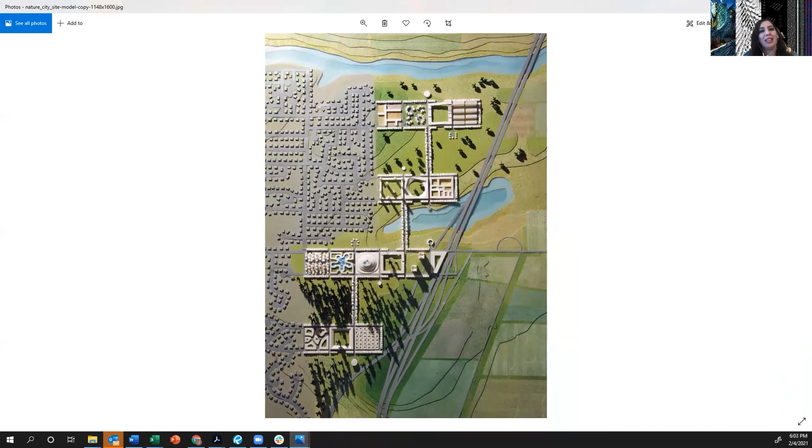Yes, thank you, Professor Huber. I would actually be more than happy and honored to introduce our guest speaker, Dr. Christoph Reinhart, for today. And I will tell you a little bit of background, why I came to know Dr. Reinhart, but I will start with the formal introduction. For all of you, Dr. Christoph Reinhart is a building scientist and architectural educator working in the field of sustainable building design and environmental modeling.

At MIT, he is the director of the Building Technology Program and the head of the Sustainable Design Lab, an interdisciplinary group with grounding in architecture that develops design workflows, planning tools, and metrics to evaluate the environmental performance of buildings and neighborhoods. He's also a managing member at Solemma, a technology company and Harvard University spinoff, as well as strategic development advisor for Mapdwell, a solar mapping company and MIT spinoff.

Products originating from SDL and Solemma, such as ClimateStudio, DIVA, DAYSIM, UMI, and other tools that I actually use in my research, and everyone uses who are my students today. DAYSIM, UMI, ALFA are all used in practice and education in over 90 countries. Dr. Reinhart has authored over 140 peer-reviewed scientific articles, including 2 textbooks on daylighting and 7 book chapters.

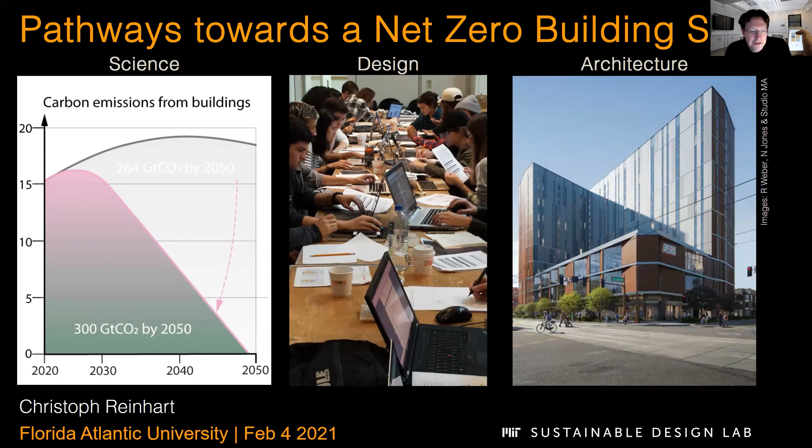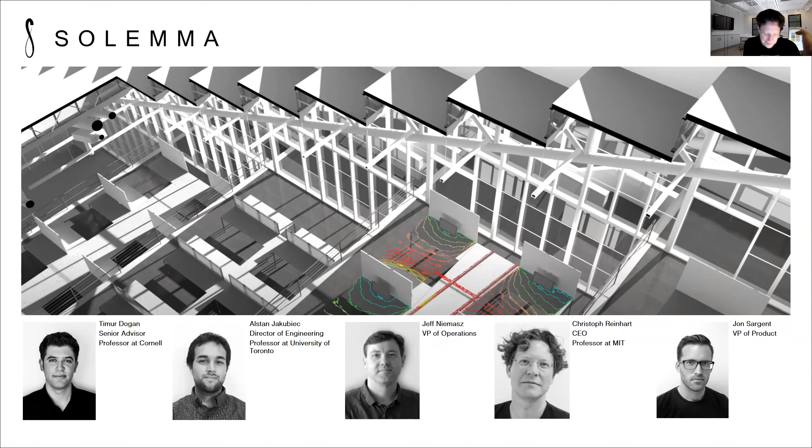Before I actually get started, when you're a scientist, after a while you obviously get used to your ways, and there are certain tools that you're good at and you keep on using them. But I think it's always useful to take a step back and just reflect. At MIT, we always pride ourselves to aim to work on the world's biggest problems, to see what leaders and others say the world's biggest problems are. And obviously, this is really well brought together in this quote from President Biden's address. We have just so many issues right now. Attack on truth and democracy, the virus, growing inequity, systemic racism, and the climate in crisis. And I always want to redirect our research and help to address the most prominent issues.

So today I'll talk mostly about our work in relationship to a climate in crisis, the relationship between buildings and how we can overcome together this crisis. So the majority of my talk, since this is a School of Architecture, will be about our work on individual buildings. But the last 5 minutes or so, I'll also expand and talk about our work on cities and energy policy. And there I'll talk about some of our efforts to address growing inequity as well, and how we can make sure that as we make our building stock less carbon intensive, we have the federal and state incentive programs in place, so that this change happens across the building sector. So let's get it started.

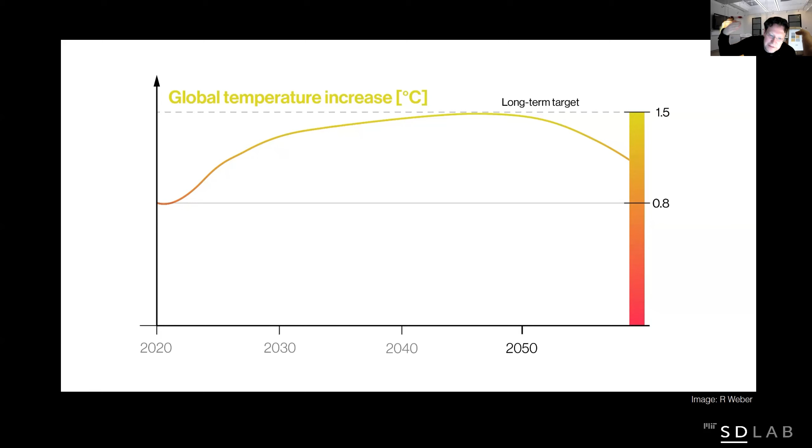And I'm showing the next couple of slides because I feel, after reviewing this data, that it's worthwhile for every architect to know, for everybody to know. And I want to implore you that there's a sense of urgency right now. So what are just some simple facts? If we trust the Intergovernmental Panel on Climate Change, then if we want to keep global temperature rise under 1.5 degrees Celsius, we have, as a humanity, 580 gigatons of carbon left in 30 years. So that's our budget today.

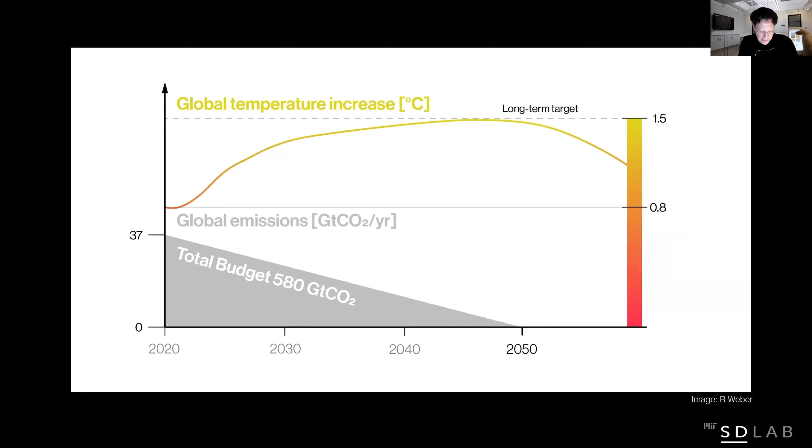And then as architects, we're probably interested in the building stock. So right now, the building stock takes up about 40% of carbon emissions. We'll probably be the slowest to get to net zero overall. If you look at the announcement, for example, from General Motors, the transportation sector, with cars not getting that old, is aiming for 2035 to be carbon neutral.

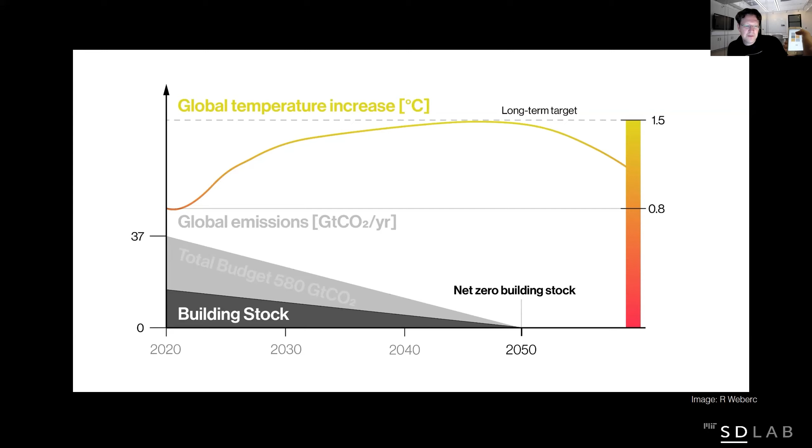So let's be generous and give ourselves more than half of the carbon budget. That might be a nice number for you to remember or put on a t-shirt. So we have 300 gigatons of carbon and 30 years left to make the building stock carbon neutral.

One complicating factor is that the building sector doesn't stay static. The projections are that we're going to double the built area worldwide in the next 30 years, so that's a really hard problem. That might be good for architects - basically, in the next 30 years, we're going to build as much as we built in the last 5,000 years. But it's not clear that architects will be involved in all of these buildings, which makes our task even harder.

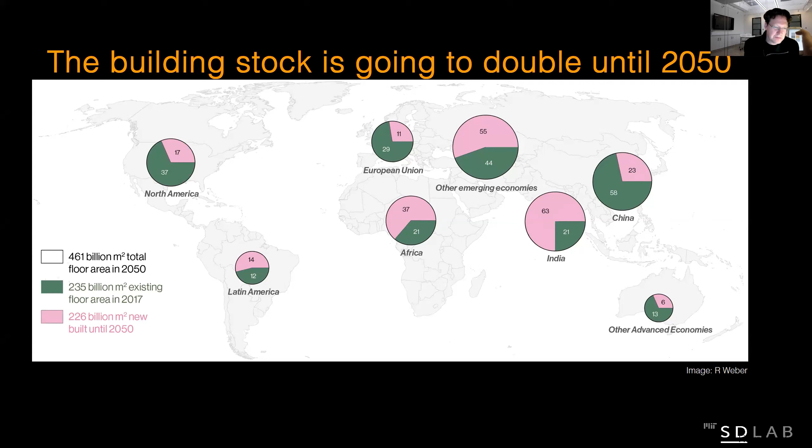If we do business as usual, which is a 1% renovation rate per year, and we slowly work towards better construction practices by 2050, then buildings are going to burn our whole budget for all of humanity.

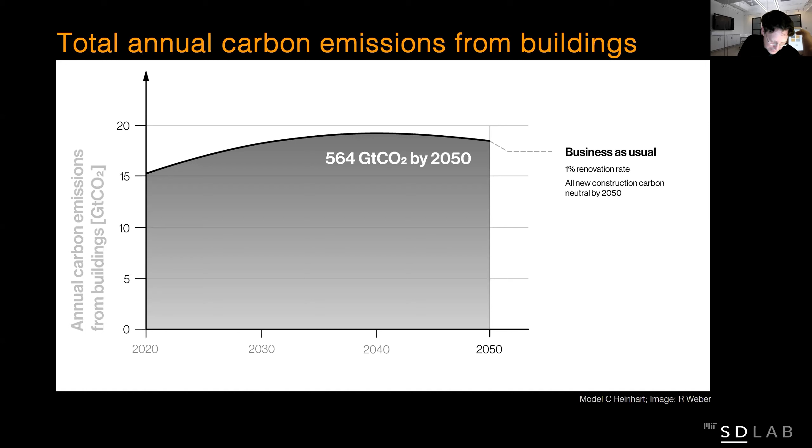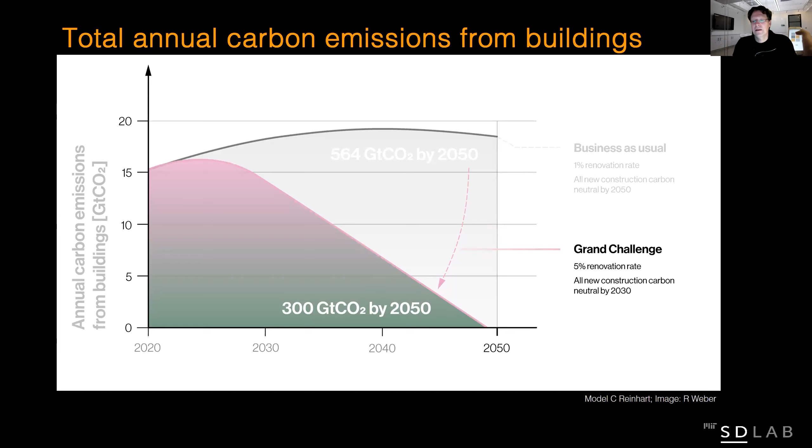So really, a way going forward is simple to think about: we have to increase the renovation rate to 5%. You should all try to also become experts in how to renovate buildings. And we, on the research science side, have to find within 9 years systems to make all new buildings carbon neutral. So 5% renovation rate, carbon neutrality - that's the simple goal for the building sector. And how do we get there?

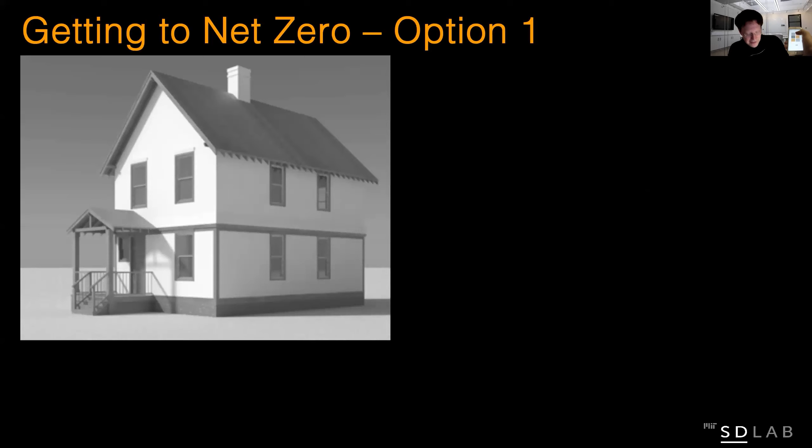Let's start with the perspective of a building owner - how does a building owner get to net zero? Imagine you own this cute little uninsulated house in Boston. There's a very simple way, and you should probably take it, that you can do tonight: you go all electric. You start by replacing your air conditioning system with a heat pump, so you electrically heat and cool.

And then you just sign up for a local green power system. What happens then is your energy bill will go up from $3,500 to $6,000 a year, but your building effectively becomes carbon neutral. Now, when you follow that route, which energy policy is kind of pointing toward, you are really exporting the problem to the grid, because the grid has to become net zero as well.

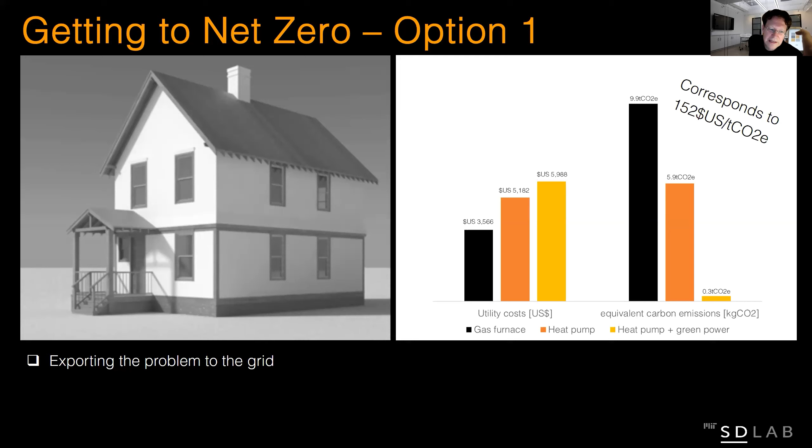What practically happens is that during cold hours in the year, our heat pumps are so inefficient that we have to increase the capacity of the grid by a factor of 3 or 4. So if we just take the simple way out, this is not going to work, because the grid won't be able to become carbon neutral and deal with these large variations.

So owners need help, ideally from good contractors or architects, and there's this long thorny road. You have to do a little more to your building than just call somebody to switch your air conditioning system. You have to add insulation, new windows, weather stripping, heat pumps, PV - all these different systems together. And if afterwards you're still together with your spouse, because it's probably a major undertaking, then you've done your share, so to speak, towards carbon neutrality.

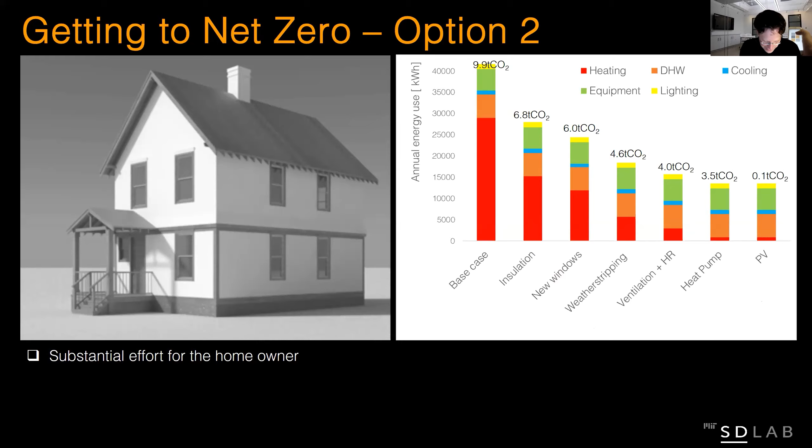So obviously, it's not that easy to go through this process nowadays. I think we need to train every architect to know at least how to design for net zero ready buildings. One of the tools and methods you can use for that is computer-based building performance simulation.

Fortunately, it's not just me saying that. If you look at the latest document by the American Institute of Architects promoting the Architect's Guide to Building Performance, there's a clear statement in the preamble: building performance simulation is not just a good idea, it's an essential part of building design.

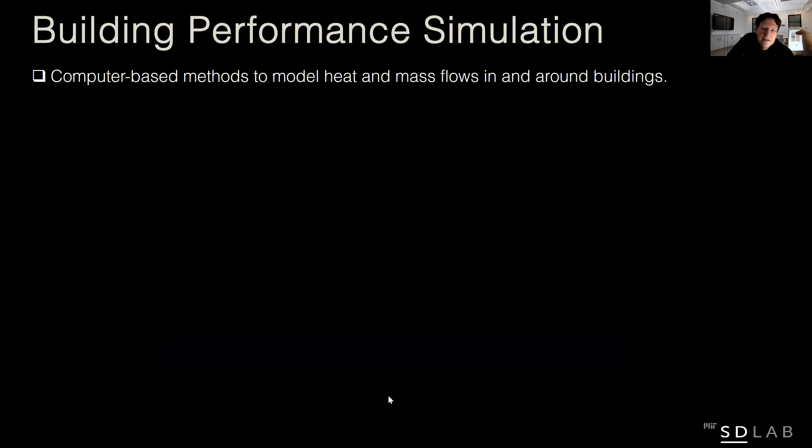So what is actually building performance simulation? It's the computer-based attempt to model heat and mass flows in and around buildings. That doesn't sound very exciting, but it's very useful. Effectively what it used to do is allow us to calculate how big your boiler should be, or how much energy your building uses.

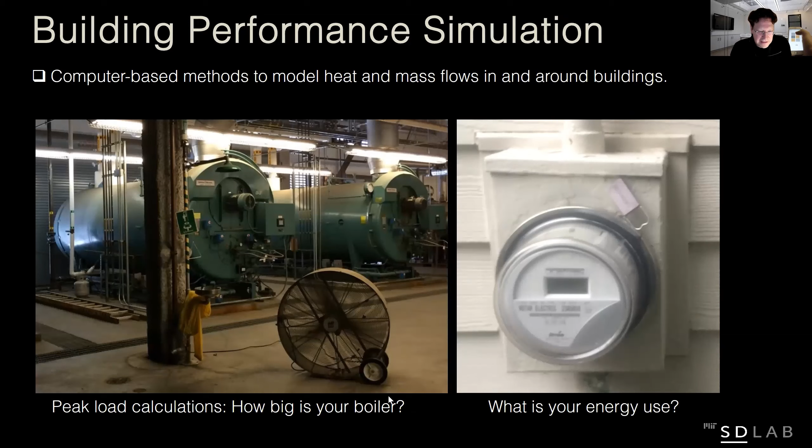That doesn't tend to excite a lot of designers, but fortunately with modern technologies, we can actually do a lot more. We can effectively model the whole human experience in buildings. So for an individual anywhere, at any point, we can say how thermally comfortable you are, how is your aural comfort, visual comfort - and we can, in high detail, control and design for more comfort and health in buildings.

At the same time, where we're getting smaller in detail, we're also getting bigger in scope, meaning that nowadays - and I'll show some of this - we're not modeling just one building at a time, that's too slow. We can model a whole city at a time.

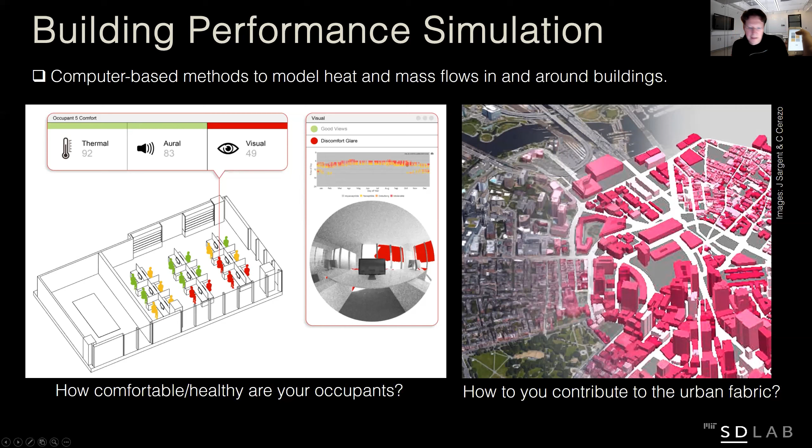And I'll talk about that in a bit. Of course, the field is not that new. It was started in the 70s, and companies have used this method in the past.

Practically any LEED certified building needs building performance simulation. So we've always been interested in seeing, okay, a lot of people tell you, oh, I'm using these tools. Well, how efficiently are you using them actually?

So 10 years ago, we did a survey, how fast time flies here, and we asked one of the 100 leading firms in the US and in Canada that we know use performance simulation. So, well, how often do the simulations that you pay for actually change your design?

And we found that firms, which was a good result, that have in-house modeling have better collaborative processes. So there was a higher chance of the simulations doing something actually than in the case when the design was finished and you just hired a consultant to post-rationalize what you have done.

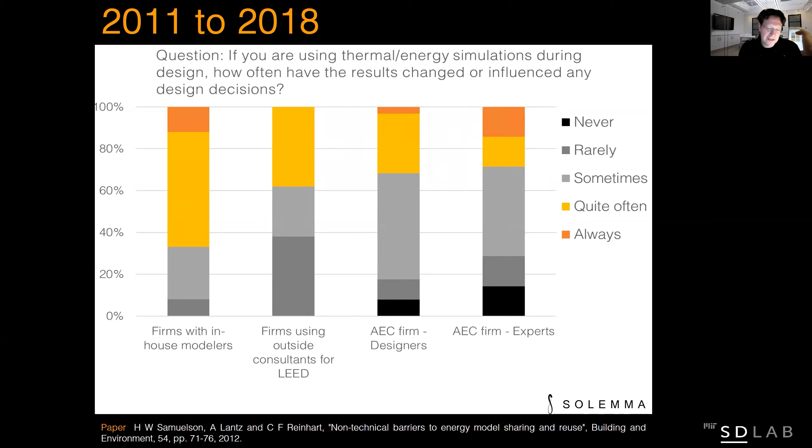Unfortunately, when we did this again in 2018, two years ago, with one of the largest US architecture firms that has many awards for sustainability, we actually found that overall their perception was that the simulations didn't have enough of an impact. Maybe because the level of expectation was higher, but that's what we found.

So we poked a little more and we wanted to see, is there an interest in change actually? So we did another survey and basically asked the designers and the modeling experts in these firms, big American firms.

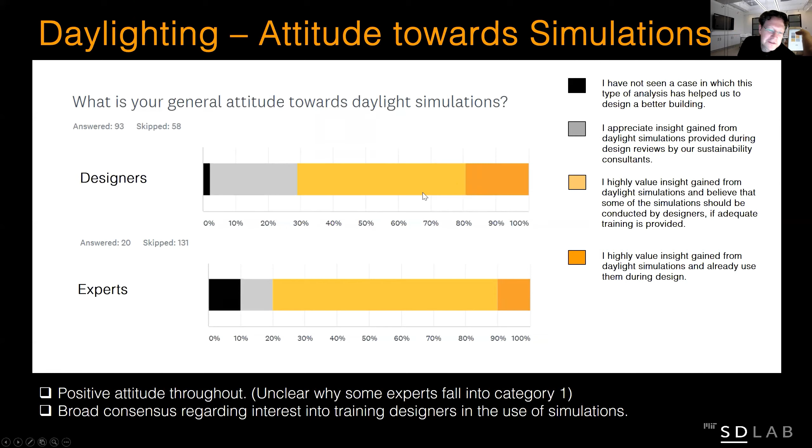So do you think you should be doing the daylighting analysis? And you know, yellow and orange always tends to be good news. So a lot of yellow means there was an enthusiasm for the designers to do the daylighting analysis themselves. And there was a similar enthusiasm to do the energy analysis itself.

So we felt now is the time, there's an interest in change. So what we did two years ago, we teamed up, we created this advisory group with 15 firms, some of them like KPF, HOK, and Gensler, you might know.

These are some of the very large firms, but we also tried to balance it out internationally with some of the larger Japanese firms, as well as lighting designers, smaller architecture firms, and manufacturers.

And we've been working for 2 years with these firms with the pledge to say that in 5 years, meaning from now on in 3 years, all member firms should be able to conduct and interpret thermal and daylighting analysis by themselves.

So after a year of developing various workflows, we came up a year ago with this tool called ClimateStudio that you can download from this website. It's a Rhino plugin, and all the blue dots show schools of architecture that use it right now for teaching.

And I wanted to talk a little bit about our philosophy behind using this tool, but this is not a plug for a tool. Use any tool you want. I think it's more a framework for you to operate in.

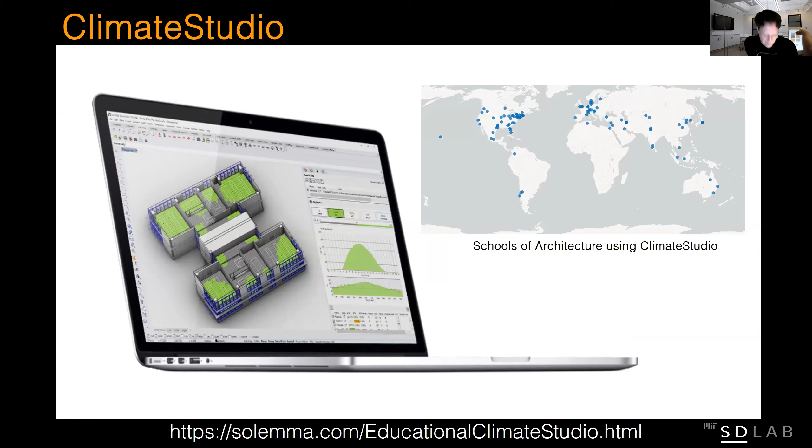So what I wanted to do, since I'm talking to architecture students, was to show you these 8 steps. Hopefully a lot of them are familiar to you, but I would love to hear after the talk a little more about how you are dealing with these problems, what works, what doesn't work.

And I just wanted to walk you through an example. So we have one term where we teach daylighting and energy at MIT. It's for second year undergraduates, students that study architecture, so they're sophomores, and it's for the MArch incoming class.

So, I mean, site selection obviously has many dimensions. That's something where you cannot just go by walk score, but it's probably a good idea to just get a sense that when you pick a site, it's not so far out in the boonies that all the energy savings you make are overcome by people driving there.

The second part I recommend, so I think this is the core. This is just to make sure, this is, I think, the basic. I think everybody should know how to do this.

So you start off using the Energy Star Portfolio Manager. These workflows take all of 20 minutes to half an hour. So I just want to impress on you the ease and the necessity to do this. So if you want to design a building of a certain type, you should know how much energy a building of this type in the US uses.

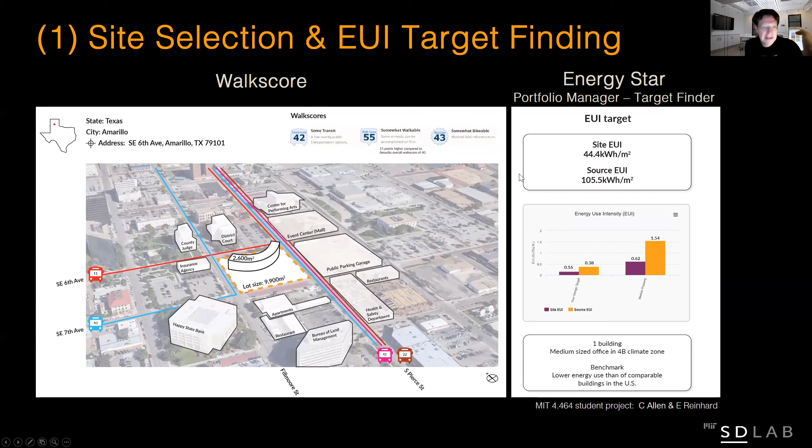And then you should look at climate. And of course, just about any school of architecture does this right now. Usually this ends up being like a wall of data that nobody can interpret. And I think it's incredibly important here to pick your message.

So if you are, this is actually a site in Amarillo, Texas, probably quite similar in climate to where FAU is. So what matters? Sun comes mostly from above. In the summer, you don't want the sun, so well-insulated roof.

And then there's, of course, this iconic graph that always shows you that a south-facing facade gets more radiation in the winter than in the summer. So that's a good mix. So work with the sun, building faces south.

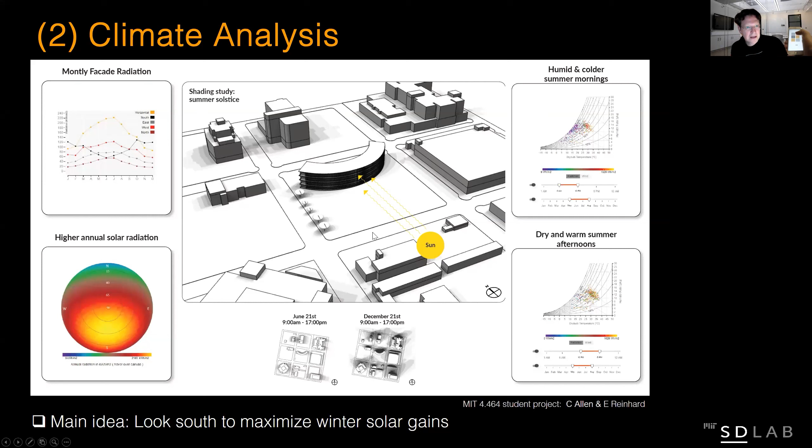Pretty simple concept. And then here, we work towards play with massing models. And there I would always say, if you do massing, use daylighting, not necessarily energy. Energy is not a great form giver for a building, partly because our building materials have become so much better that you have a lot of choice there. But lighting, you don't have the choice.

So here, typically, for example, there are 3 ideas: a box with an atrium, 3 small buildings, and this crescent building. And the data, in a way, speaks very quickly for itself that the crescent, apart from probably being more attractive, also is fully daylit in terms of area. But it has some problem with direct sunlight, 15% of the year, but it's better than the others.

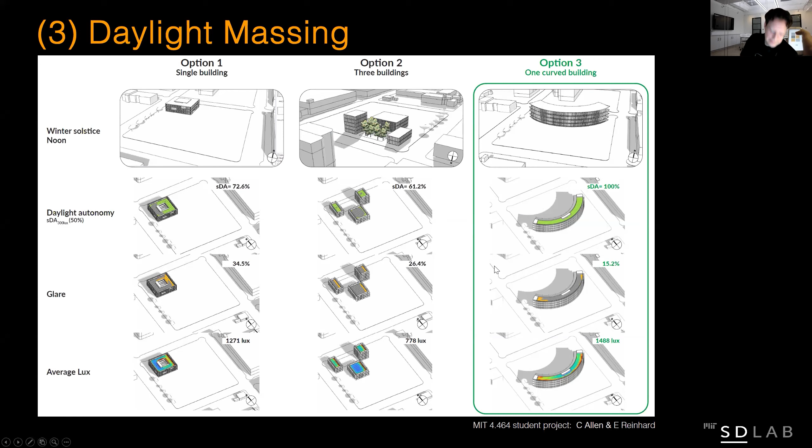So here, it's a bit of a slam dunk to use this building for further analysis. And then they just tinkered around with the facade design, changing the vertical angles, pretty similar studies that you should probably do in Southern Florida. And then, without compromising the daylight in significant ways, they managed to get rid of most of the unwanted direct sunlight. So pretty clear and quick study.

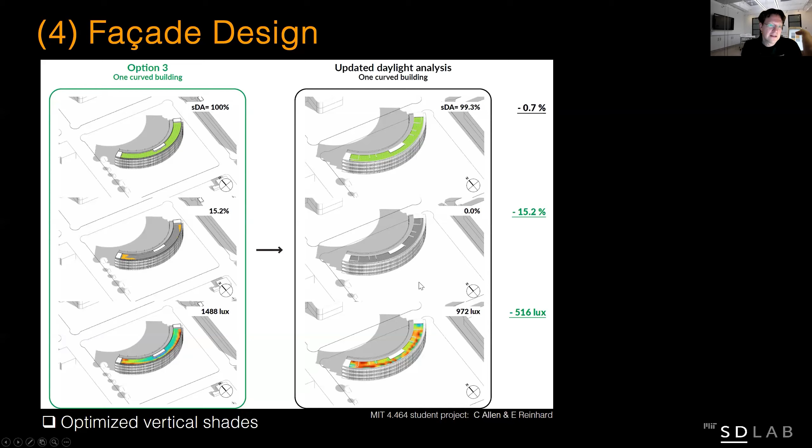And then the next step was to say, okay, well, how are people really going to feel in the building? So for that, you can zoom in. So if this is your building, I'm zooming in deeper and deeper. And then I get these little pizza slices. And the slice tells me when it's red, then most of the year when you look that way. So if I'm standing here and look towards the window, I'm experiencing glare.

That's not shockingly surprising. If you are next to a curtain wall facade and you're with your nose to the facade, then when you look out, you probably have too much glare. But you see pretty quickly that where the furniture is located, so this is good for furniture layout and orientation, the glare is largely gone.

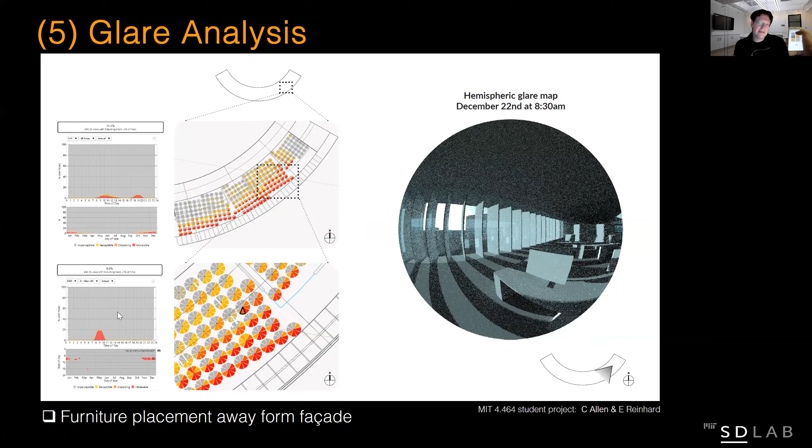And so in this case, when you sit here and watch this way, you only have a couple of months in the year from 8 a.m. to 9 a.m. when you have a glare problem. So you basically, for that whole building, covered glare and daylighting.

Then we'll be moving on to electric lighting. There, I think it's key that you're the architect, that's your job. Figure out good products and place them in the building, making sure that it's aesthetically pleasing and hopefully energy efficient, with modern LEDs that has, of course, become simpler than ever.

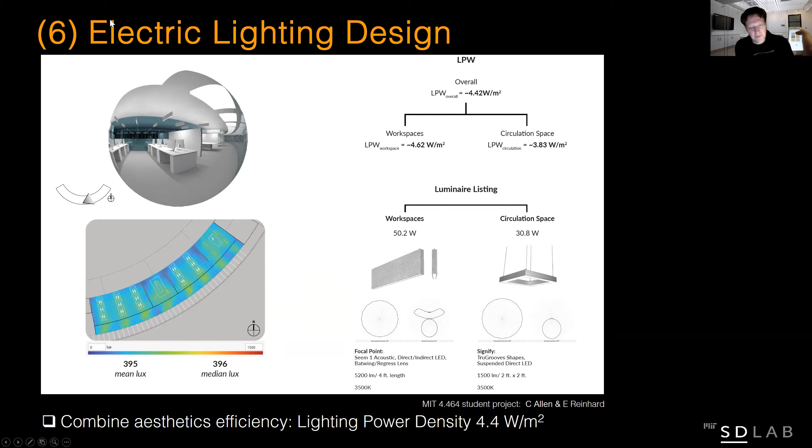So then you are your HVAC engineer's best friend if you manage to keep your lighting power density down. So how much energy does your lighting system need? And what these first 6 steps are probably the bread and butter of any architect.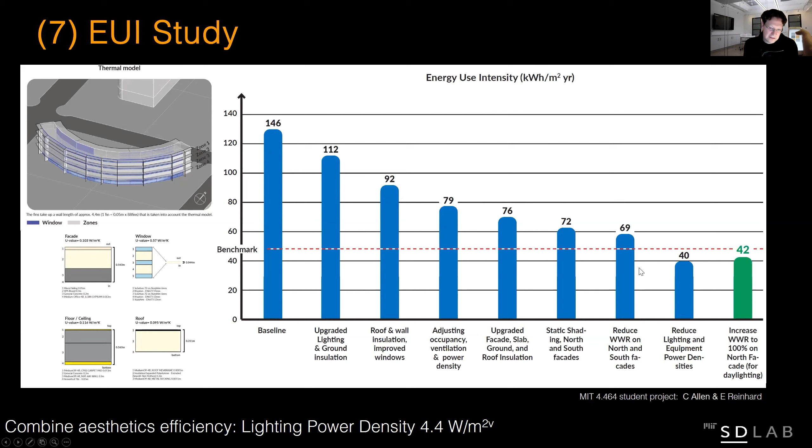And then some insulation, you tinker with the air intake, you play with the facade, and then you basically get under your low benchmark line. So these are kind of the big steps to take to make your building more efficient.

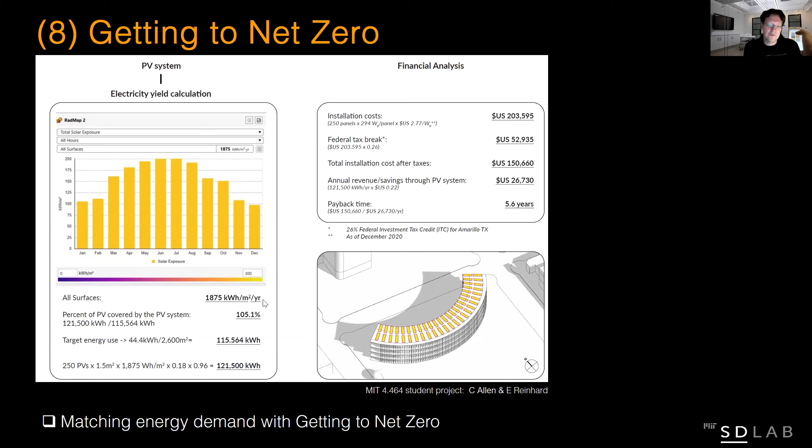And finally, you can do a quick photovoltaic analysis, put a couple of panels, actually in this case you only need a few. And then in terms of balancing basically annual electricity production from solar and energy demand, this would give you nominally a net zero building.

So is it really that easy? No, it's not. I mean, this is one term, 14 weeks, but what are we missing? We pretty quickly just assume very high construction standards for your facade, your envelope. You predict occupant behavior, which is notoriously difficult to predict.

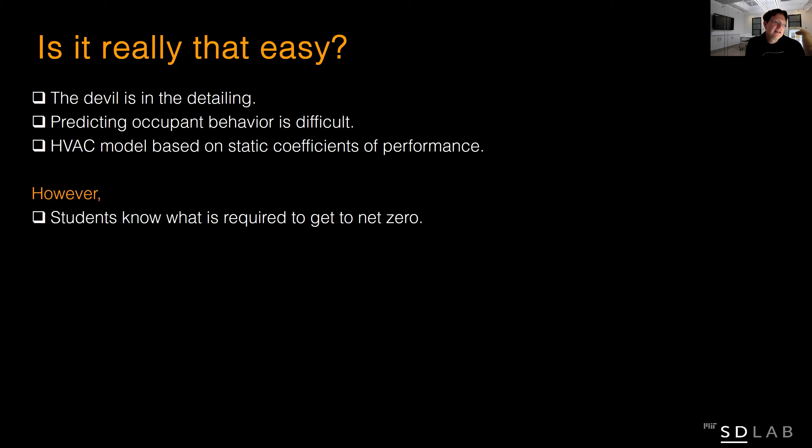You make a lot of assumptions, and your HVAC heating and cooling model is quite simple. However, this gives you clearly a roadmap. And when you're designing such a building, it's not that you're sitting by yourself and you have to design it. You have an HVAC engineer, a lighting designer, people that help you with that. But if you want to be the overused word master builder, you should basically understand the large flows that go into and out of the building to define certain goals. And this is really the main part of this exercise here.

So if that's fun and you want to work a little more, we actually made out of that MIT class a MOOC last year, and we ran it twice last year. It was great. We had 30,000 people in the class, and we will run it again this year, probably in late spring. And that's of course free. If you go to the edX site, you'll find it there.

And if you want to do something tonight or you're bored now, we basically have this little web app called climaplusbeta.com that you can use on your smartphone, which allows you to do the type of analysis that I just showed you, just on a simple box. We developed this because we wanted to have an impact in Africa and India, and we had thousands of people from India actually taking the class. So it's the same concept, only for smaller buildings.

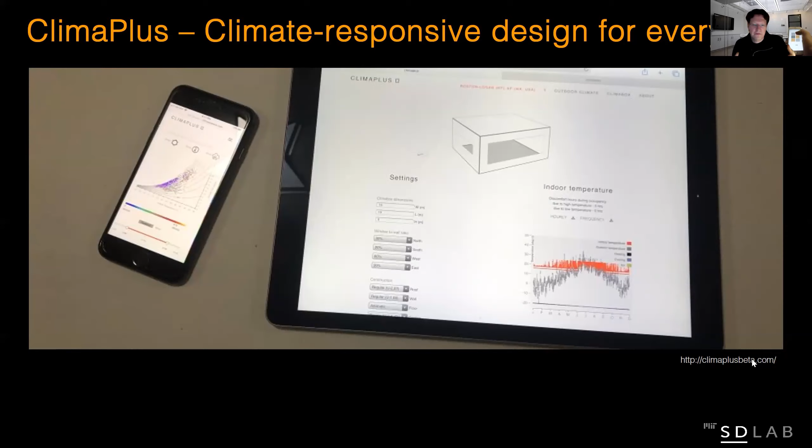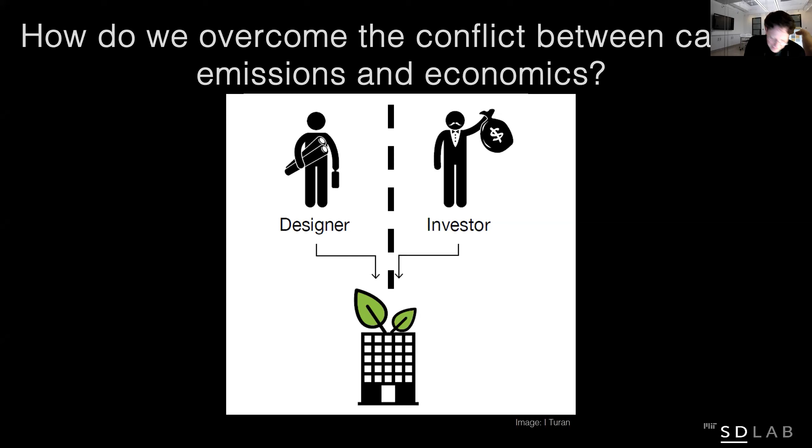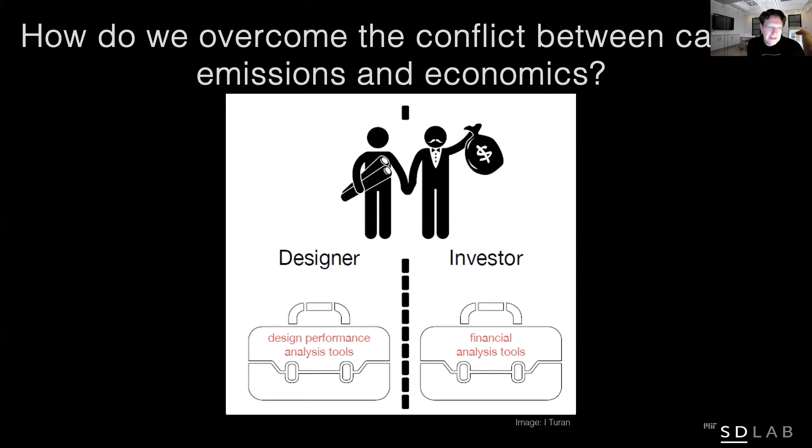So I would call what we've done so far more bread and butter, and I want to move on to what's next, what we're working on now. I especially like to highlight the work from Irmak Turan, who just graduated with a PhD from our program in August. Together with her and the MIT Real Estate Innovation Lab, we looked at these two parallel worlds: designers that use tools to make green buildings, and investors that use their own tools. I love this graph from Irmak. We basically wanted to bring the two worlds together and see how we can have our financial and our performance thinking more aligned.

One way of trying to do this as a first step was to just evaluate something like daylight that I just talked about. So how much are people willing to pay actually for daylight? What we did in this case, we had rent collected for 5,000 floors in Manhattan rental contracts, so we know quite a bit about these spaces and what people are paying. And then Irmak painfully developed this wonderful workflow that automatically does a full daylighting analysis of each of these spaces.

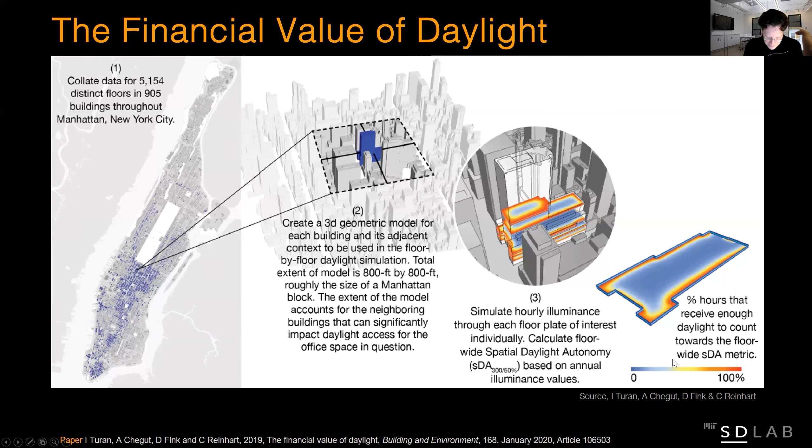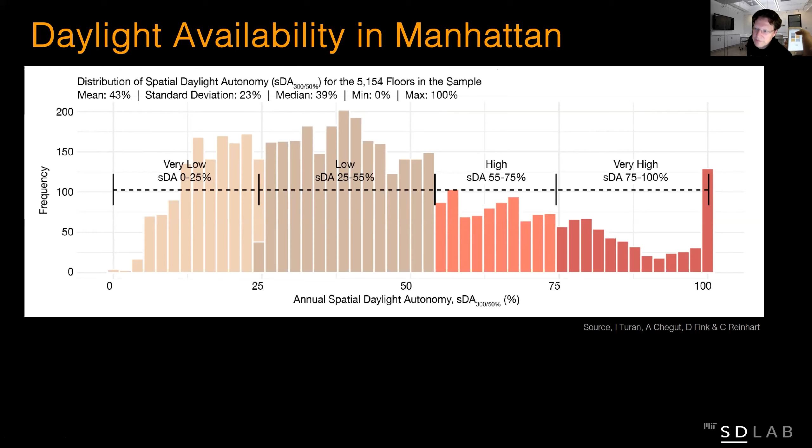And these are some of the results. Out of the batch, this shows you how many buildings in Manhattan that we looked at have very low, low, high, and very high daylight. And it becomes pretty sparse at the top. So not surprisingly, in such a dense urban setting, there's not a lot of daylight around, which means this was good for our study, because daylight is a true distinguisher. So it's intuitive that people would pay more for it.

When you actually apply this to a hedonic pricing model, which is something the real estate sector uses to set the rent, for example, we found that everything else being equal, just having good access to daylight increases your rent by 6%, which is quite substantial. Comparing that to energy use, for example, typically your rent or your mortgage is 10 times higher than your energy prices. So if you have good daylight, that covers in value about half of the value of your energy costs.

So that was the first part, just looking at daylight. We also wanted to understand a little better the question of view. And view is interesting because probably universally everybody thinks, I want a building with a good view. It's valued in architecture, it's valued in real estate, but we don't know how to evaluate it in the end, which is kind of surprising still. But we know there's a benefit of being able to, when we are in a building, see objects outside.

So in a way here, we kind of went a little backwards. We developed an architectural metric for view. And when we applied this to Manhattan, we wanted to see if we design that way, are people paying more for rent? It's kind of convoluted, but it's a first step. I would say the metric also makes sense as a design giver, but we haven't demonstrated that yet as a form giver. So how does it work? You basically place yourself somewhere in the building and you shoot rays in all directions to see what's out there. Then we get credits if you see landmark buildings, green spaces, ground, or surrounding waters.

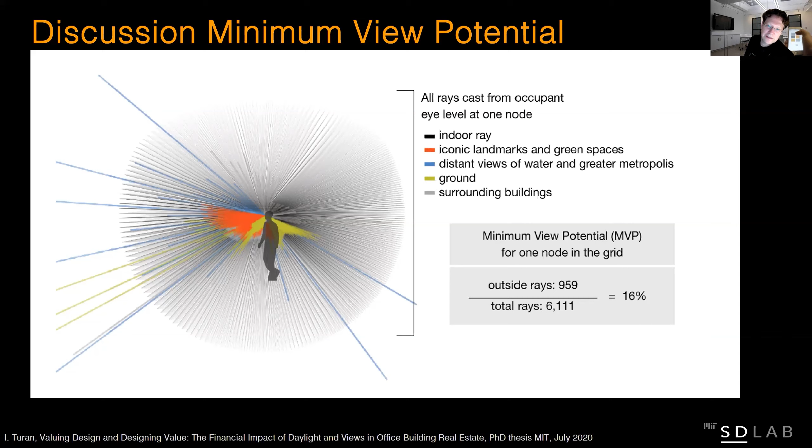And then there's a percentage attached to that. If it's above a certain value, then you have enough content to say, I call this a view. In this image here, Irmak applied this to 15 State Street in Lower Manhattan. So if you're standing right here, you see the Hudson, Lady Liberty, Battery Park, and some other buildings. So this would have a view.

And if you repeat that analysis, then you have 24% of your area that has a view. Now we were interested: you don't need to have a view everywhere, but there probably has to be a certain minimum of view so that somebody visiting your space says, wow, this is great, that has a great view, I want to rent here.

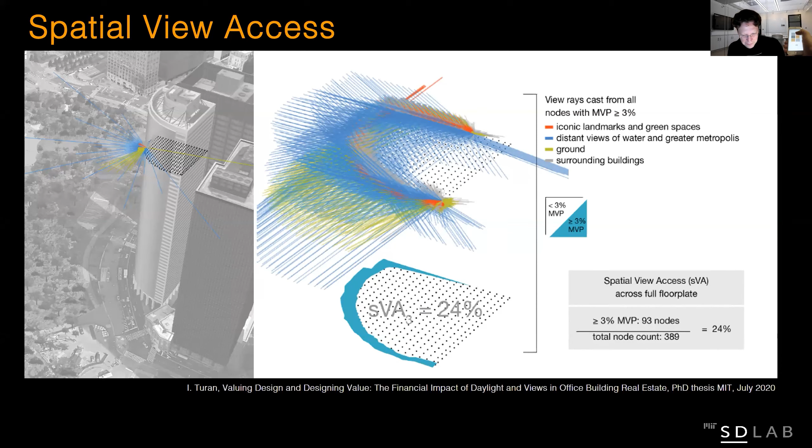And what we found is very similar to daylight: for spaces that have more than 10% good access to view, there's a 6% premium. Unfortunately, the two don't add up. So it's great if you have daylight or view, and people are already willing to pay for either view or daylight. But when you have both, there's a maximum to what people are willing to pay. Of course, in denser urban settings, you can trade off one against the other. It's a work in progress.

Some other work we've been doing: now you have these beautiful daylit buildings, but what do we do if nobody's in the building? That's a real bummer. And of course this is changing, right? We have changing working patterns. The idea of being 9 to 5 in your workplace is not attractive to a lot of people. After COVID it's probably not enforceable anymore, and probably not even desirable in the first place.

So we want to be able to, maybe as designers as well, think beyond the constraints of the buildings and see how we can at least impact our immediate environment. And there the keyword would be enhanced outdoor thermal comfort.

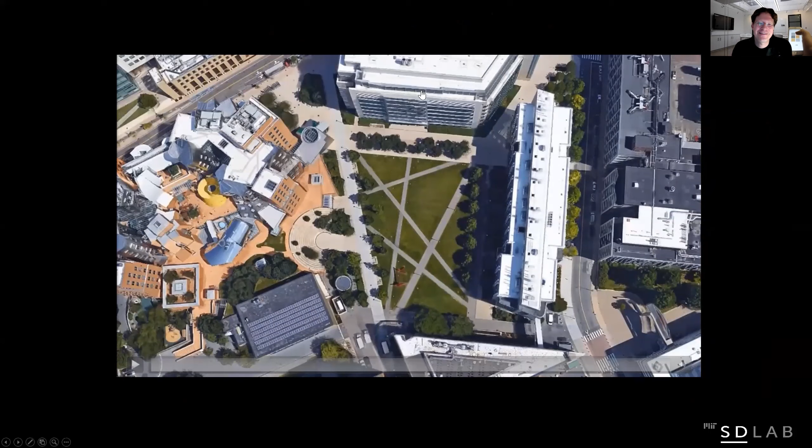So we studied this beautiful outdoor space called the Susan Hockfield Court, or the MIT North Court, which is very well used. To orient yourself: this is the Gehry Center by the Stata Center, by Frank Gehry; this is the Koch Institute. These are actually public cafeterias, and there's ample seating both in the sun and in the shade.

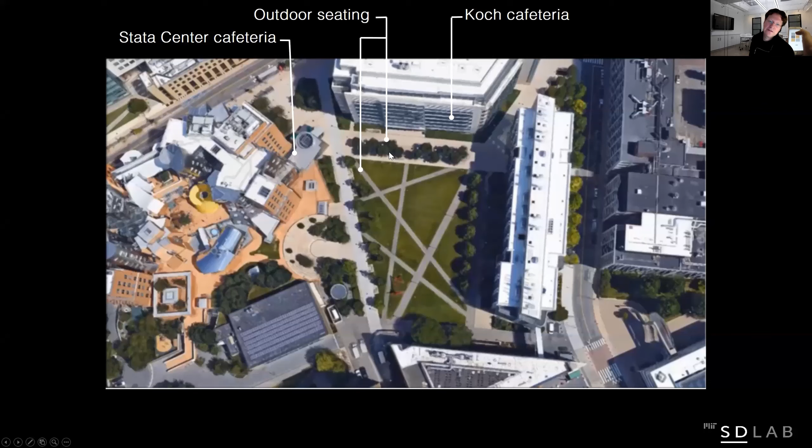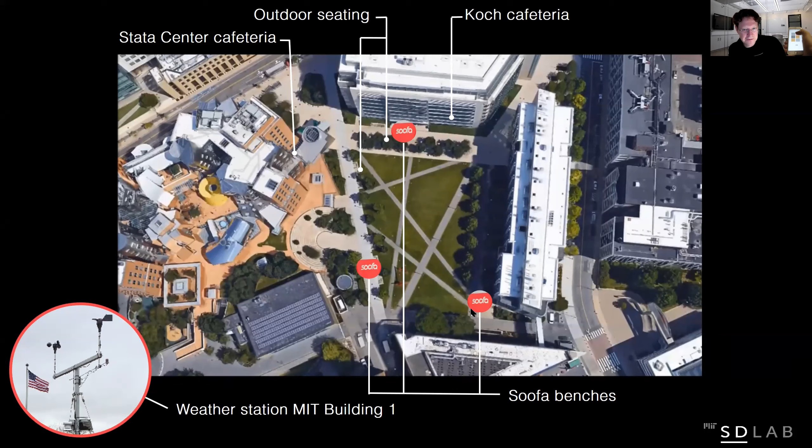And we wanted to understand how people are using the space. So what we did is we had a weather station installed, and we put Soofa Wi-Fi scanners out there. We had to go a little back and forth with our institutional review board to be allowed to do that. What we effectively did is collect this data — kind of a crash course in urban privacy.

If your phone that you probably hold with you has Wi-Fi on, what happens? Your phone is screaming into the world nonstop, 'I'm a phone, and this is my MAC ID.' Actually quite a few shops are collecting that data. What you can do with this is basically pinpoint an individual if that individual comes back. We obviously encrypted the data and threw it away afterwards, but we wanted to understand how individuals use a space.

So this is what we collected: a total of 30 million pings in 11 months, concentrated on the work days. This way we could actually identify what are people and what is just urban infrastructure. We found that our North Court is visited by nearly 700,000 people a year, and we have 16,000 regulars — we were particularly focused on these 16,000 regulars, because they have a choice.

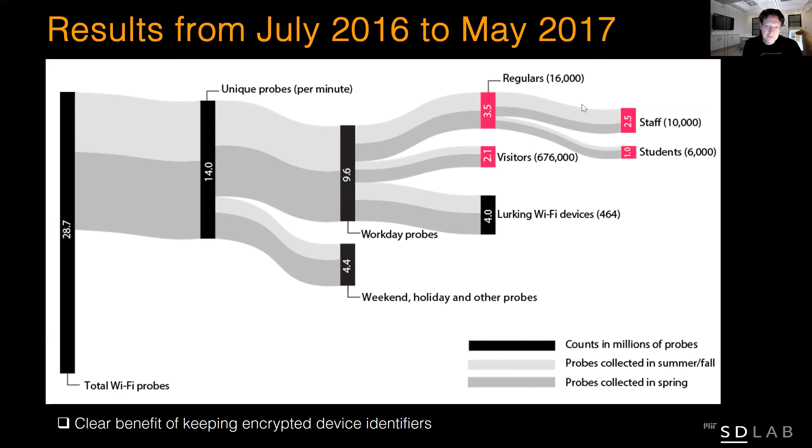When you visit Cambridge and it snows, you're probably still going to come. But when you're living there, you have the choice to sit outside or not. So that gave us — we knew when people are outside.

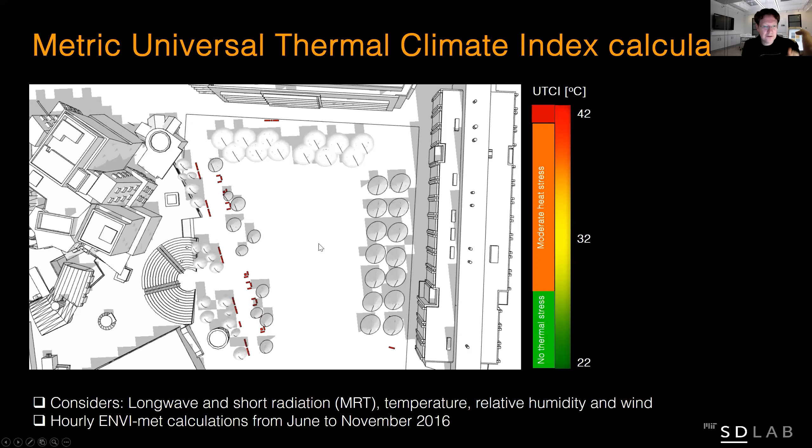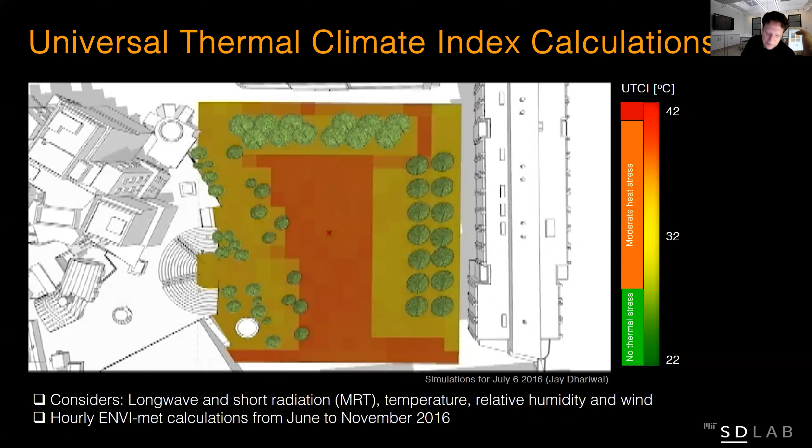And when we overlaid this information, thank God, after 2 years we had some good results — this is work by Jay Dhariwal during his postdoc. We have this really beautiful curve that basically shows we can predict very well when people are outside and if they are comfortable. There's a very clearly defined peak, and that's really wonderful for all urban planners and designers. So you can probably expect in a year or so that we'll have some good tools that calculate this very quickly for you.

And then you can just expand beyond your building and you can see when and how often people are going to be comfortable. And that means, where do you put the entrance? Where do you put the park bench? Where does the Starbucks go, right? Where do you have your bike sharing stations? We have some early indications that where the bike sharing station is located is a trigger. That drives if people are taking this. So you can make a real meaningful difference to your surroundings.

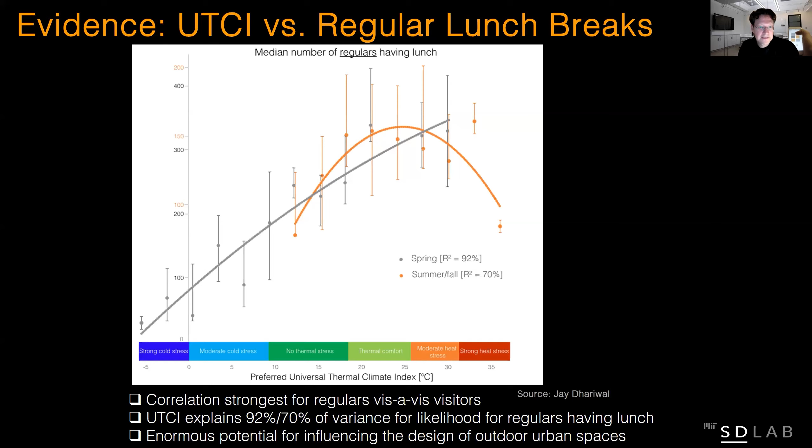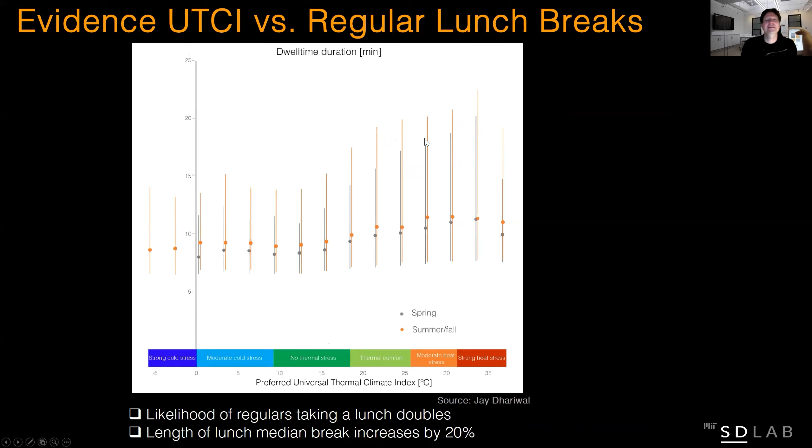Before moving on to urban, this is my favorite graph from this study. What that basically shows you is how long people at MIT, just a little sidetrack, are having lunch. So if the weather is terrible, the mean lunch break is 8 minutes. And if it's divine, it's 12 minutes. It's a little sad, actually. So I wish for everybody to basically extend their lunch break during good weather.

Okay, I know we don't have a lot of time, but I wanted to talk a little bit about urban modeling as well, because it's such an exciting field, I feel. So what are we doing here? We're not modeling one building, we're modeling 10,000, 100,000 buildings. And for that, you need the same type of weather analysis as you did before. It gets a little more complicated if you want to map urban heat island effect and other issues. And then you need urban geometry. And that's the hardest part, you have to have reliable descriptions of the local building stock. And I'll put these things together.

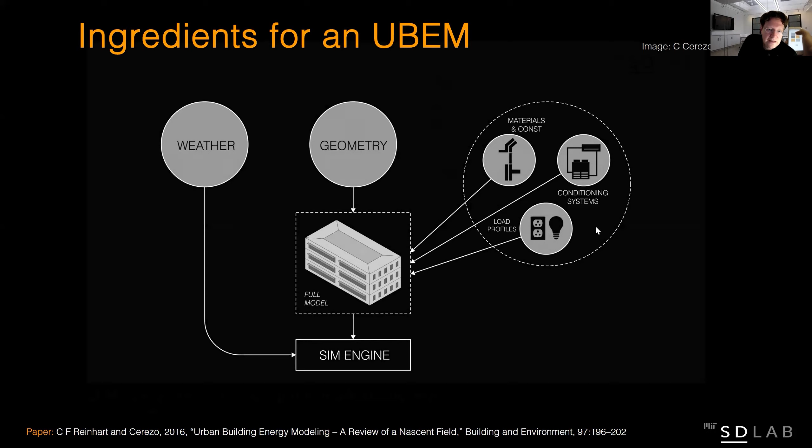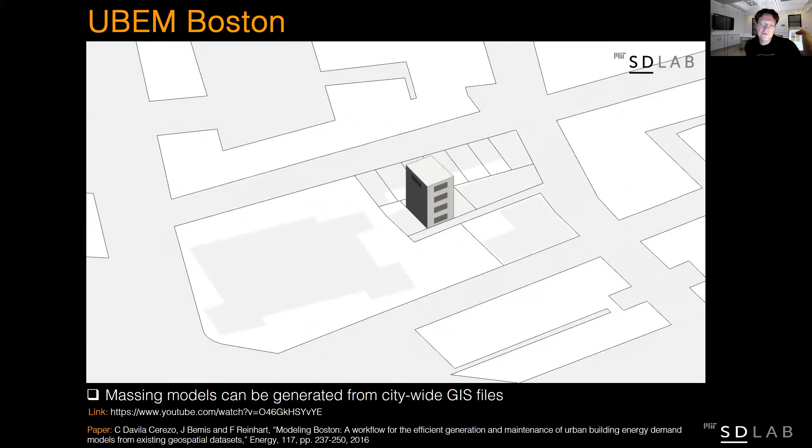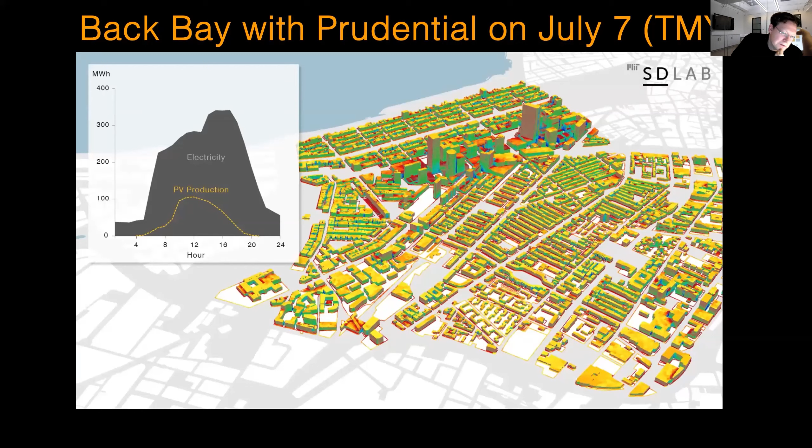The first time we did that was 4 years ago in Boston. You see here the GIS model, and then we basically auto extract a building and its floors, and we have local zoning. So we know if this is an office or a residence, and then we do an energy model automatically of each building in the city. And then you get these maps that allow you to say for every hour in the year where energy is being used, and you can basically start designing a whole energy infrastructure around this. Or you can make the same type of predictions saying, well, how do we get to lower carbon use across the whole city? We've done this now for 4 or 5 larger cities, but we wanted to basically expand the number of people that can do this type of analysis.

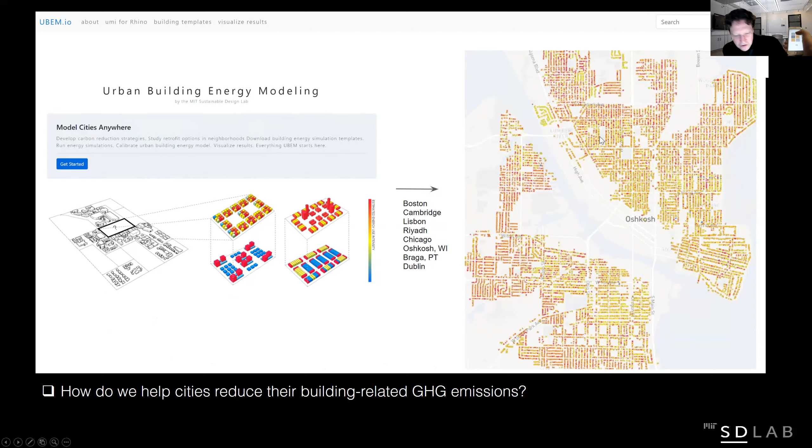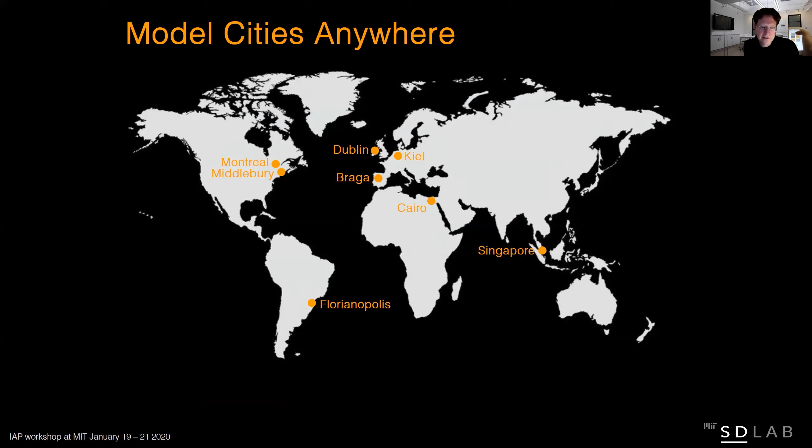So this is our new toy. It's called UBEM.io. If you Google it, you'll find it. When you have a GIS file, it makes it very simple to create an urban model. So it helps you to connect your GIS data to a template library, and then you get something like this, which is an urban model of the town of Oshkosh, Wisconsin. So we wanted to see how well this works and if people are interested in that. So 2 weeks ago, we set up a workshop, which was really fun, for 3 days. We had city representatives from Singapore, Florianopolis, Cairo, Braga, Kiel, Dublin, Middlebury, and Montreal all together. And basically in parallel, we talked about what challenges cities are facing that want to reduce their carbon in meaningful ways, and how these types of tools can help them do that.

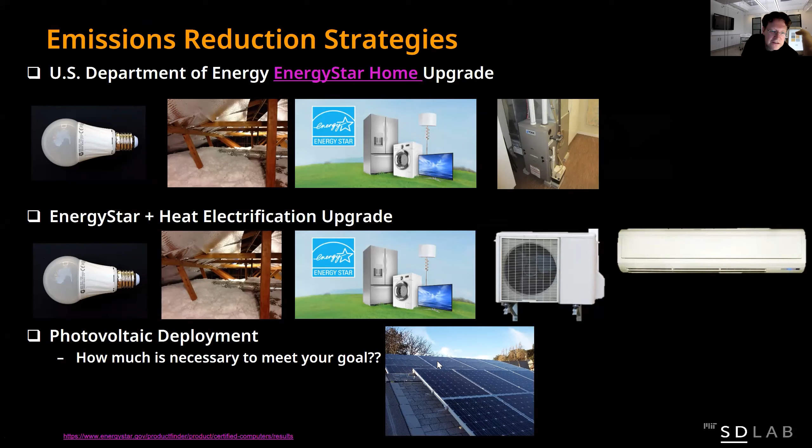So just as a final flavor, I want to give you what you can do in a small town such as Oshkosh, Wisconsin. We basically started looking at Energy Star upgrades. That's a home improvement program from the Department of Energy. So this is all off-the-shelf technology: efficient lighting, insulation, more efficient appliances, and a high efficiency gas boiler. Or what I mentioned earlier, you do the same thing, but you electrify your building with a heat pump, and you could add PV. So how does this look for a whole town?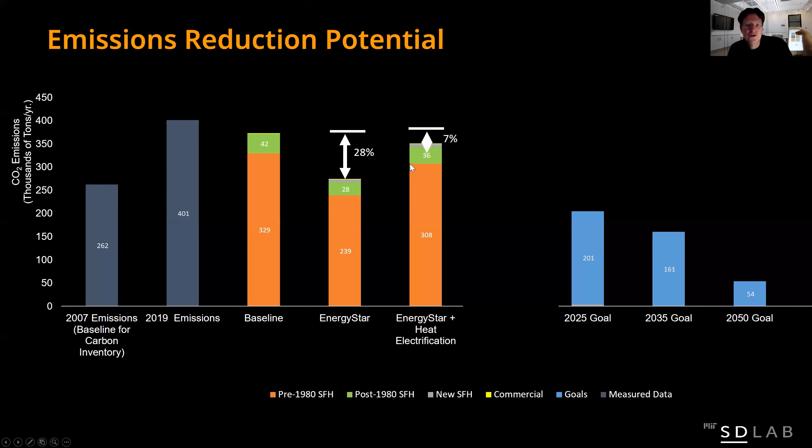And so this is our calibrated model of the city. When everybody upgrades to Energy Star, you reduce by 28%. Oshkosh has a really dirty grid because they burn so much coal. So electrifying is actually not a good idea, at least today. So you have to basically cover the equivalent of half of your roof area with photovoltaics to get there. And I think just to bring home what we said at the beginning, this is a big lift. So, I mean, all these goals that everybody's throwing around, that doesn't come easy.

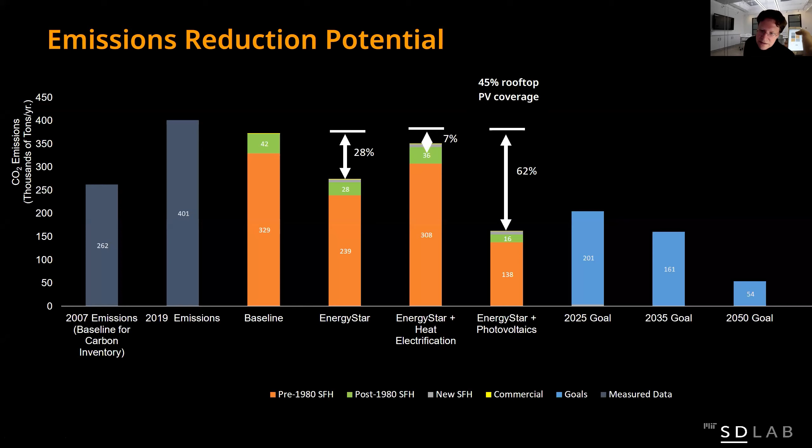That's a lot of effort that cities have to undergo. But how does it look? I mean, in the end, it's people that own homes that make this decision. So how does this look? If you want to do an Energy Star upgrade in Wisconsin, in Oshkosh, you pay $8,500 cash. That includes incentive programs, and you get your money back in 5 to 9 years.

So pretty decent compared to the stock market. And you save a third of your carbon emissions. Now, if you want to also go solar, you put $26,000 on the table. Interestingly, the payback time doesn't change so much because solar is so heavily subsidized, but you save 2/3 of your carbon emissions. So this is where we are right now, talking with various stakeholders from the federal government level in Congress down to the state level.

How do we now make this more equitable? So how do we identify, with this more simplified packaging of upgrades to buildings, how do we set up a program so that households that have lower income can quickly decide to opt into that and be supported? Having certain revolving bank loans to help with the $26,000 and so forth. So that's something that we are quite actively pursuing right now.

So I'm done. Some final thoughts to convince you that architects should be trained today how to set up a zero energy building ready concept for their buildings. I showed some ideas on view metrics. We have also some work on circadian health. So I think we should all collectively, especially as designers, think about how we make sure that our buildings are as comfortable and healthy as possible.